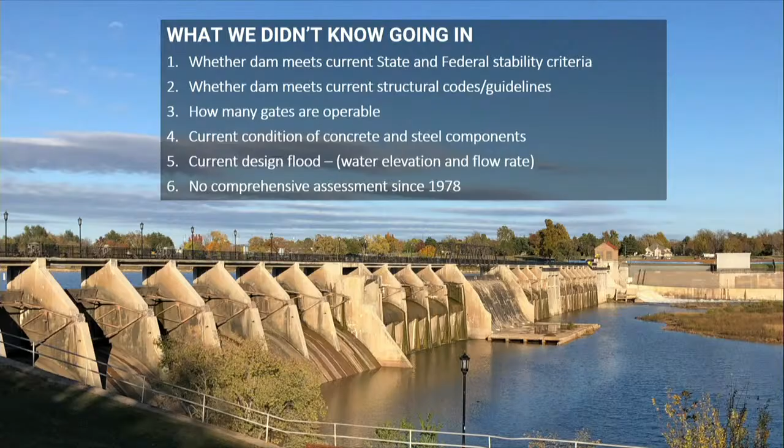The last flood study was done in 1978 using antiquated modeling techniques. We didn't have the modern computer models that we have now. Precipitation models for the local area and drainage area leading into Overholser have been updated since then. So we needed a good handle on the current design flood to know actually how much water Overholser needs to safely pass. And as I mentioned, the 1978, that was a comprehensive study done by the Corps of Engineers. It was their phase 1 program all around the country, and that was really the last kind of comprehensive assessment of Overholser that had been done.

So we developed a scope and a fee in this contract that we're here to present the report on today, and it consisted of these major components. We wanted to do a good visual evaluation of the physical conditions through a climbing inspection. We actually had climbers on ropes, going down and scaling the concrete and the gates and all that stuff. Precision survey, real detailed survey, so we can actually see micro movements to see if the structure is actually moving. Helps us determine if there's current stability issues ongoing.

Do a stability assessment of all the different sections of the concrete dam. Again, address that hydraulic adequacy. What is the design flood that needs to pass, and how many gates do we need to pass that flood? And then look at alternatives to mitigate the concerns or the deficiencies that we find in the preceding tasks. Quick question. Yes, sir.

On the volume of flow that needs to pass through that, I would guess that's probably a similar number to the number that passes over either the Meridian, the western, or the eastern dam on the Oklahoma River further on down. No, completely different watersheds. So with Overholser, we're dealing with the water that comes between Canton and Overholser, and then also the releases from Canton Dam at that point. The western and eastern have different watersheds along that corridor, plus whatever comes out of Overholser. So different flows. So they have larger numbers? I couldn't say. I don't know.

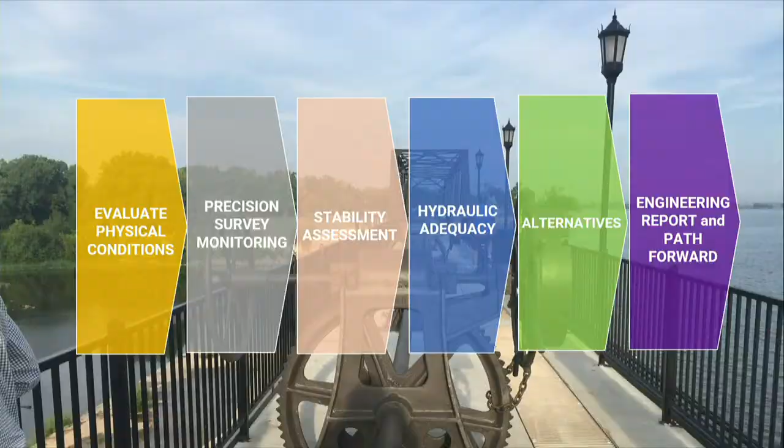The numbers we're looking at, since you asked that question, the regulatory inflow that we need to pass to meet state guidelines is 185,000 CFS. But that's down from what was in the original 1978 assessment. So it was beneficial to do the modern study. We dropped that number significantly.

Okay. So the assessment results. The floodgates need to be replaced. They're well beyond their repairable condition. Modern electric hoist systems are needed so that you can operate multiple gates at the same time to get those gates open to pass that flood. Because right now there's one mobile motor. It can only open one gate at a time. It takes 24 hours to open and 24 hours to close. It's simply not quick enough.

We did determine that only 7 gates are needed, and there's 23 there total. So there's an opportunity to permanently disengage or take out a number of those gates that aren't needed, which helps in long-term O&M costs to only have 7 gates that need to be operated. And the stability does not meet current federal and state criteria.

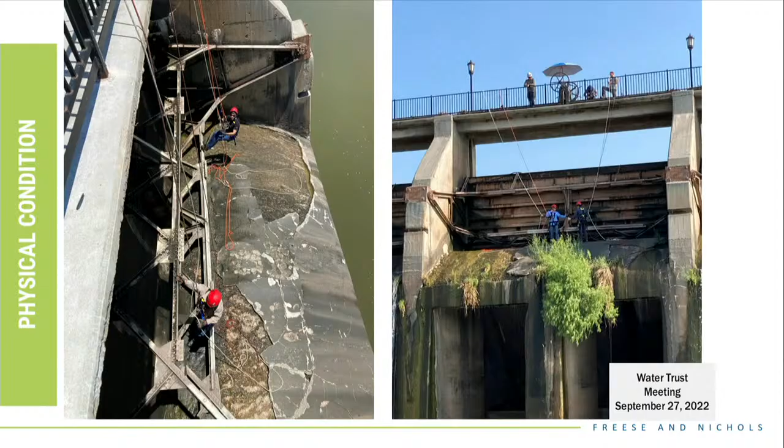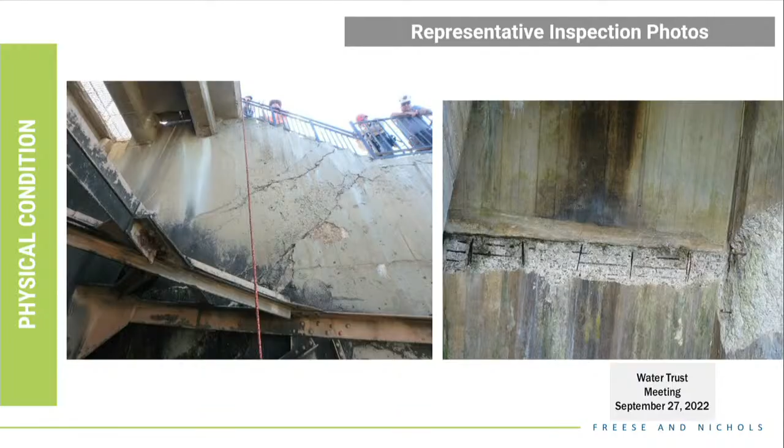These are just some sample photos of the conditions of the dam that we found during our climbing inspection. You see some spalled concrete on the left and right, corrosion of gate members, more corrosion on the steel floodgates, some concrete cracking and spalling, exposed rebar there on the right side.

So given the results of our analysis on stability and the physical conditions and the hydraulic studies, we look at 3 alternatives, and this is pretty common. These major alternative groupings are pretty common for old dams. What we do in the dam industry is we want to look at a rehabilitation alternative, keep the structure basically looking as is and rehabilitate it to meet current standards. It's commonplace to then consider a dam replacement as an alternative to that when you're getting up into these kind of dollars.

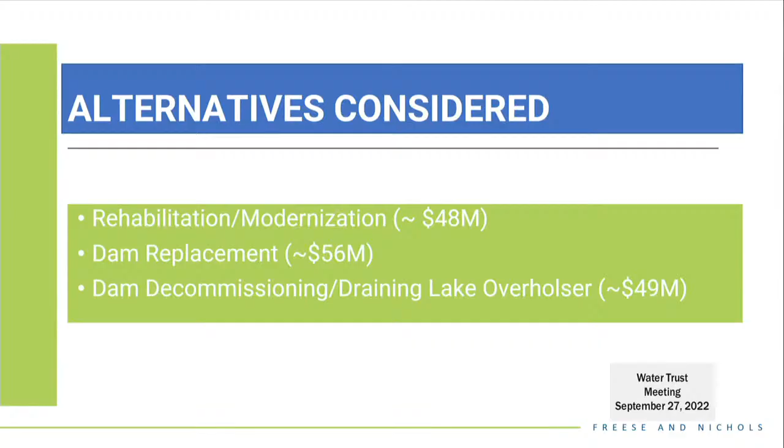Sometimes the dam replacement can be cost effective, and there may be other compelling reasons to consider that seriously. So we looked at a dam replacement, placing a dam just downstream of Overholser, and then a dam decommissioning and draining the lake, keeping the structure there but taking its ability away to impound water. And those are kind of the rough cost estimates for construction that we came up with at the preliminary phase. About $48 million for a rehabilitation or modernization, mid-50s for a dam replacement, and about $50 million for a decommissioning.

So to carry forward on a more detailed level was the rehabilitation alternative, and to break down that cost, because that's a big bite to chew at once at the $48 to $50 million range. So we got together with Director Browning and the engineering staff and said, is there any way we can phase this thing to break it up into pieces? And we said, sure, we can look at that. So what we came up with was basically a 3-phase approach.

The first phase of the rehabilitation would meet and satisfy all the hydraulic requirements. That'd be the first project out of the gate, no pun intended. And then we'd also meet the stability criteria in that same section. I'll point to a figure in a subsequent slide to show you those different areas on the structure itself. But we'd meet stability criteria in about a third of the dam in that first phase. And then in phases 2 and 3, we would finish meeting the stability criteria in those other sections of the structure.

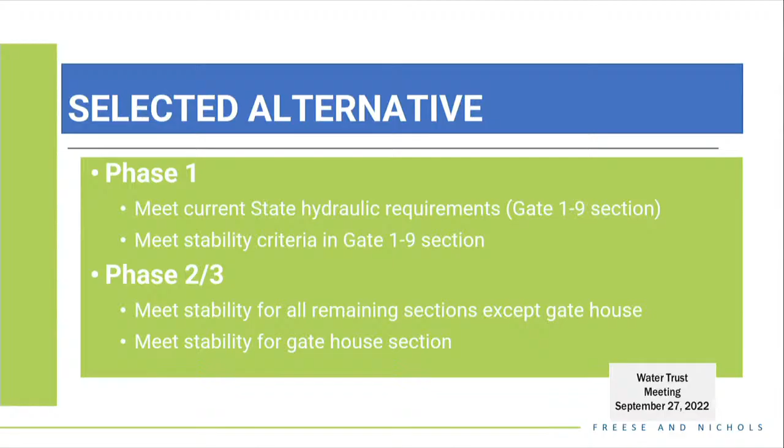Let me skip ahead to that picture while we're talking about phasing. So the phase 1 project would consist of new gates and hoists in the new part of the dam here, and then meeting stability criteria in this section as well by doing the same technique they did in the overflow spillway, filling the hollow inside with mass concrete, spreading that load out, making that section more stable. And then we'd leave a cofferdam in place across the rest of the structure and dewater it until this phase of the project can be completed.

And that dewatering process, taking that water load off the structure, improves stability. It doesn't get us to where we need to be, but it definitely improves it significantly while funds are being acquired and phase 2 is being designed. And then phase 3 is just doing the same thing over here in the gatehouse that we're doing on the left side, filling it with mass concrete to make it more stable.

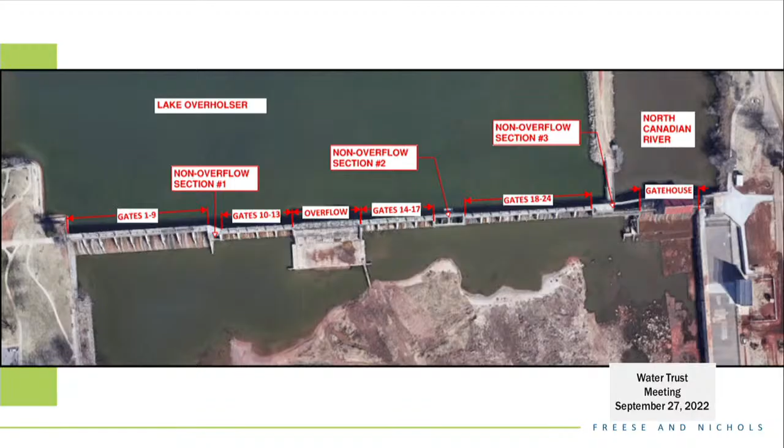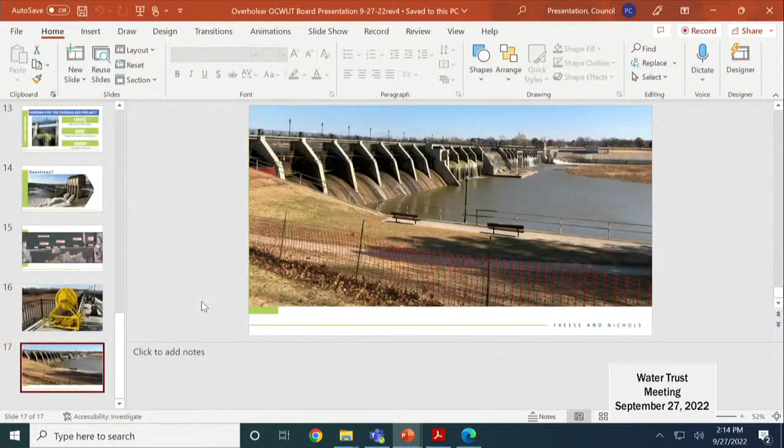Okay, let me go back to Jennifer's slide. Nope. Can you reload that for me? I think I exited out by mistake. 13. So Jennifer's going to talk about the funding opportunities for construction.

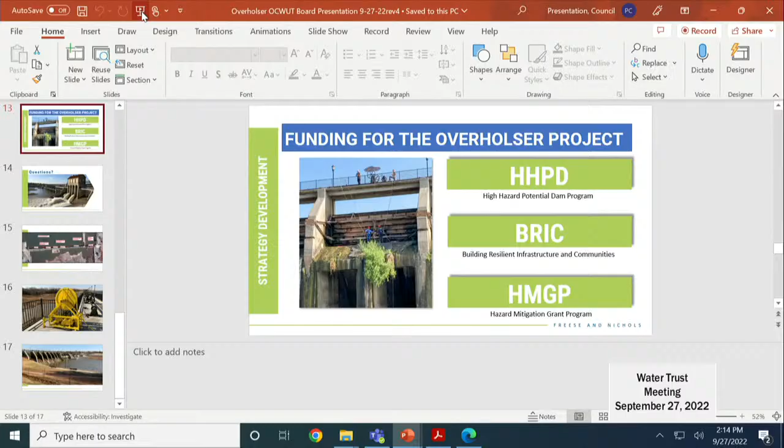Okay, as we looked at those dollars, there's a large dollar amount that comes into this project. But if you were going to have a project like this, now is the time to look for some of these alternative funding sources. Your staff is phenomenal at looking at alternative funding, things that you're not used to every day, and these are some new ones out there. There's over $1.5 billion set aside right now specifically for dam rehabilitation and reconstruction. It's over a 5-year period, but as they're doing the design and figuring out the best option, what's going to have the least amount of federal strings, now is the time to consider it for when they are finished with the engineering design.

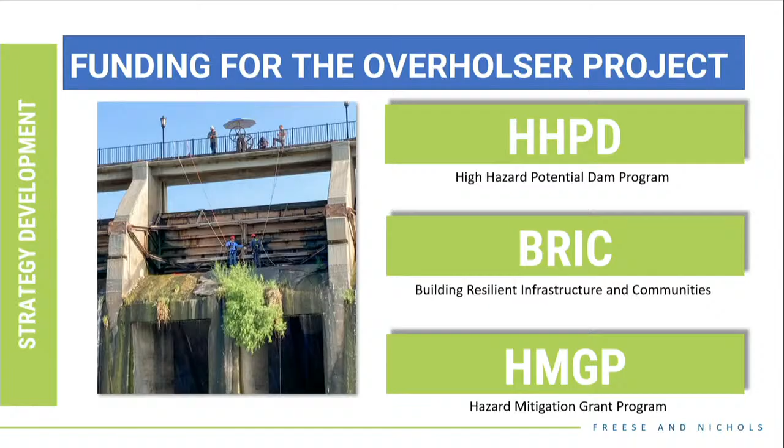These three programs are ones that you might not normally think of: the High Hazard Potential Dam program, BRIC, Building Resilient Infrastructure and Communities, and hazard mitigation. These are all programs that really look at your structure to minimize that risk. So I think this project is an ideal project to consider, either going after these funds or layering with other funding sources that are out there. Any questions we can answer for you?

No, I think that's good. Good. Mr. Browning, are you planning on putting together an event to commemorate the 100-year anniversary of the breach of the Overholser Dam? No, sir, I was not. Okay, that's probably a good idea. We did celebrate the 100-year anniversary of the construction of the dam, but I think we'll leave the breach part alone. Okay.

So I guess we need to approve item A3, which is the resolution ratifying the actions of the general manager. Oh, okay, so first of all, we need a motion to receive item A1, which is to receive the preliminary report. Is there a motion to do so? We have a motion and a second. Please vote.

And it's approved unanimously. Now we need to adopt a resolution ratifying the actions of the general manager in submitting a sub-applicant grant agreement between the City of Oklahoma City Water Utilities Trust and the Oklahoma Water Resources Board. Is there a motion for that item? We have a motion and a second. Please vote. And it passes unanimously.

Mr. Chairman, I'll need you to consider item A2 as well, to authorize me to negotiate the design contract on the recommendations. Okay, very good. So is there a motion for item A2? All right, we have a motion and a second. Please record your vote. And it passes. Thank you.